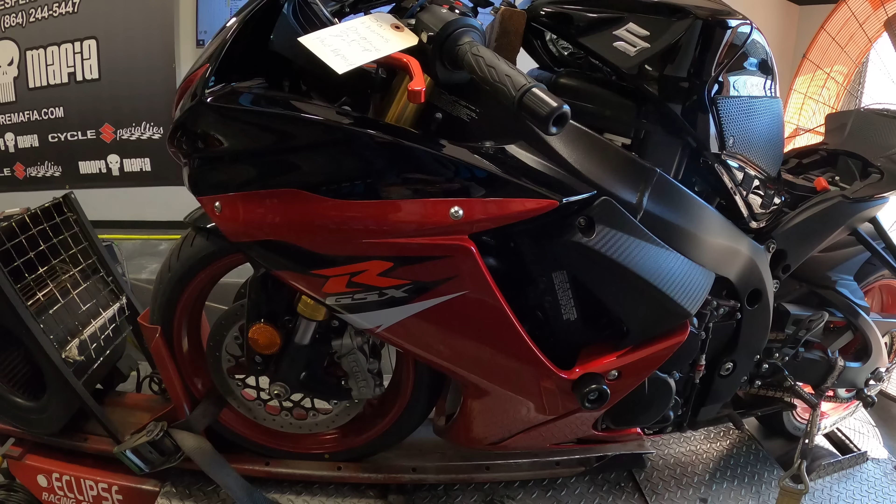Anyways, today we got a 2018 GSXR 750 with a Taylormade exhaust system. Now, I know we have dynoed a bunch of GSXR 750s on the channel in the past, but this is one that we haven't had a chance to show this exhaust system. Everybody likes to see what the different exhaust sounds like. Everybody likes to see what the different exhaust puts out for horsepower.

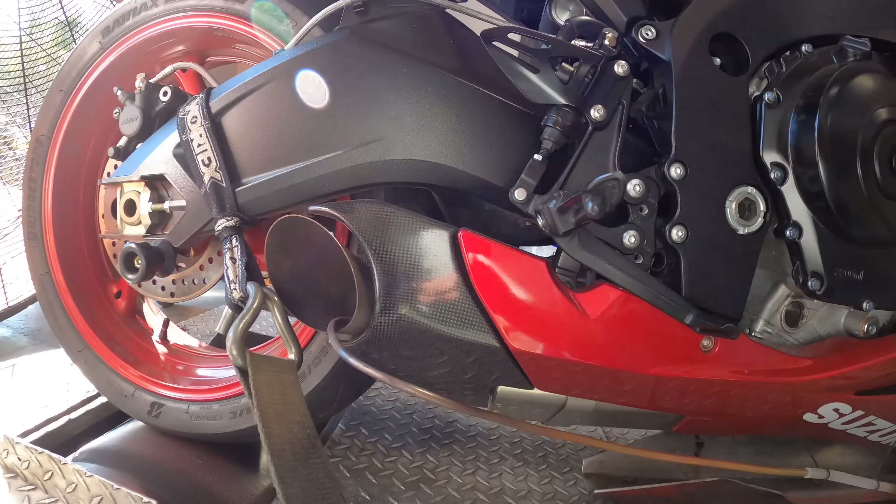If you're shopping for exhaust, maybe this is one you've been looking at. You can go back in, watch the other videos on my channel with GSXR 750s and compare how it sounds with my camera in this room and how the horsepower numbers compare.

So anyways, this thing also had a Power Commander 5 and it had an ignition module, and the customer is using the ignition module for his quick shifter. So we're gonna leave the Power Commander installed, but we zeroed out the fuel map. Now, I'm gonna go ahead and jump in and show you what our baseline pull did, how that thing did as it came in. With the Power Commander, with the downloaded map that the customer had installed, way too rich. Let's get into the details, guys.

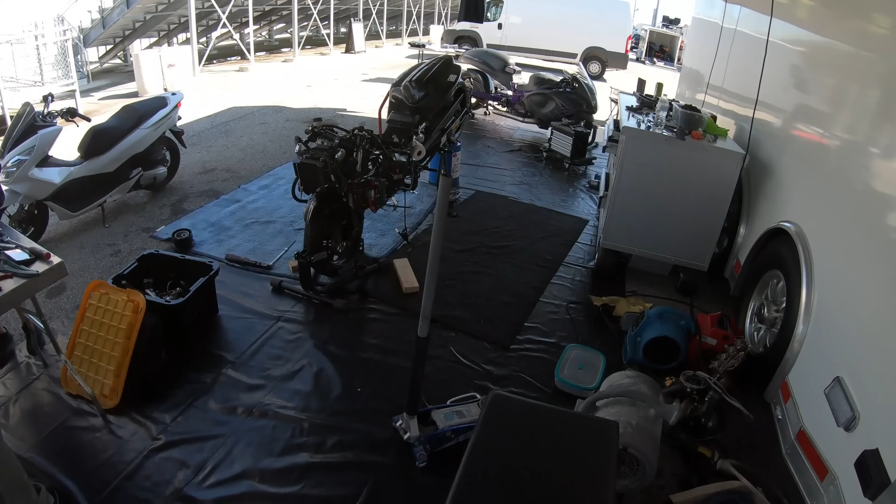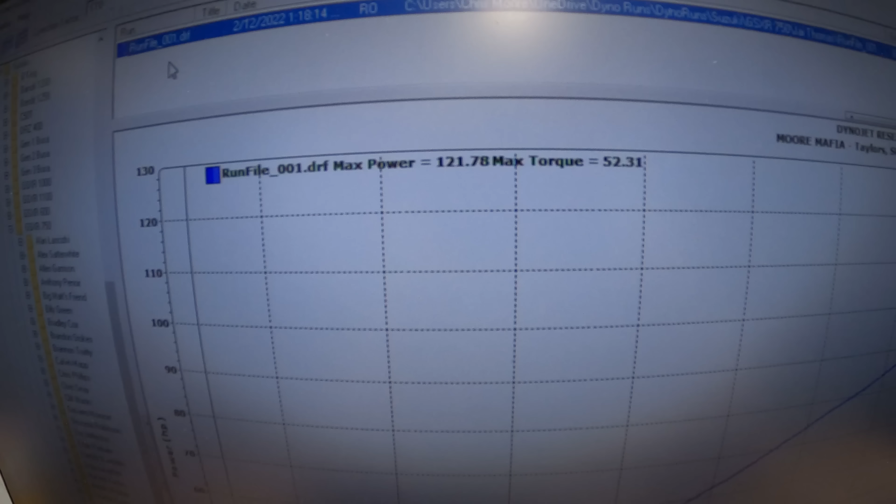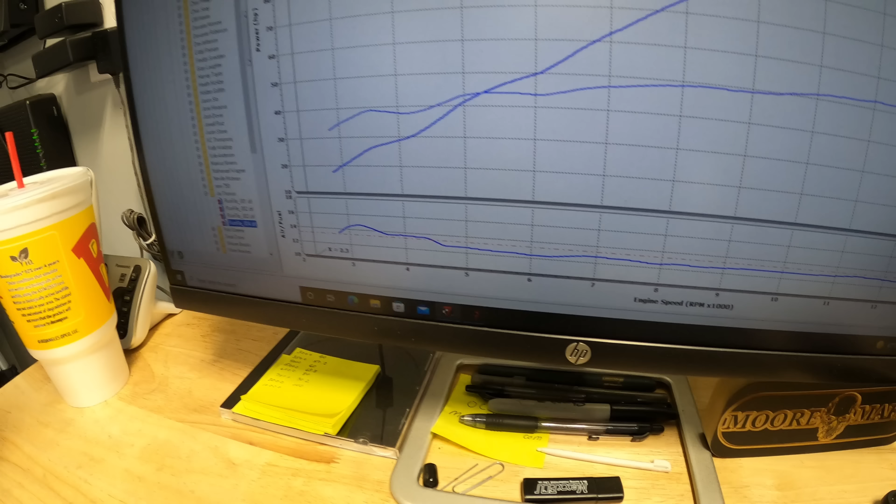Guys, so the baseline pull 121 horsepower and 52 foot-pounds of torque. You can see here how it is not smooth in the top end either. That's because the bike is way too rich, meaning getting too much fuel. Now, that happens a lot with these downloaded maps from Power Commander. They're a generic map and they're going to be built as good as they can be for each bike, but it's not a specific map for that exhaust system a lot of times anyways.

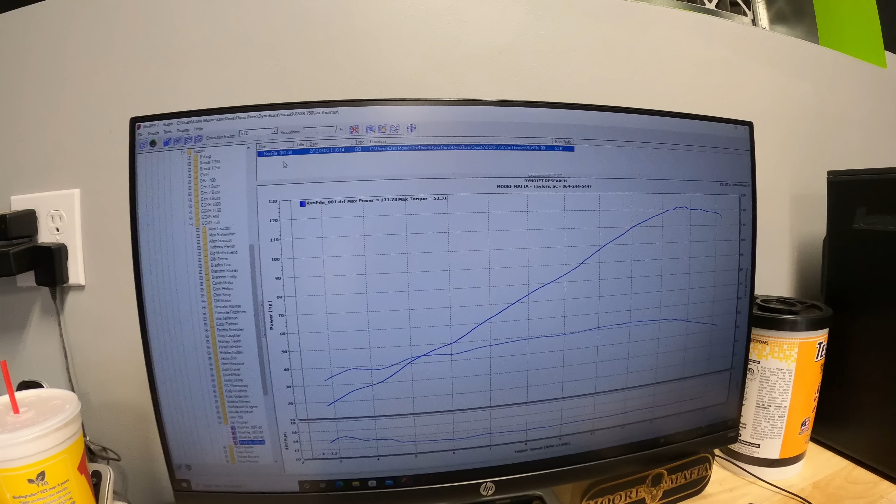So we're gonna dyno tune this thing. We're gonna get some more power out of it, see what we can do. We're gonna remove all the restrictions from the ECU, the top end rev limiter. We're gonna keep the secondary throttle plates open. We're gonna make all that stuff happen, and we're gonna do it right now.

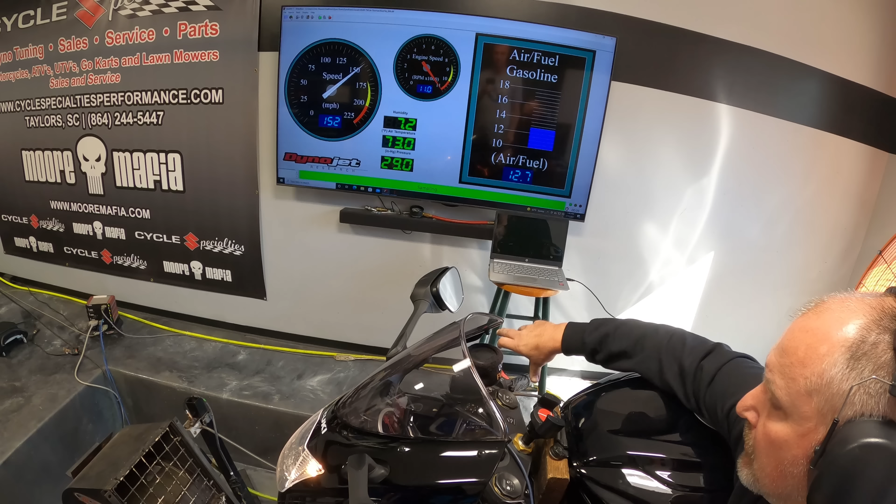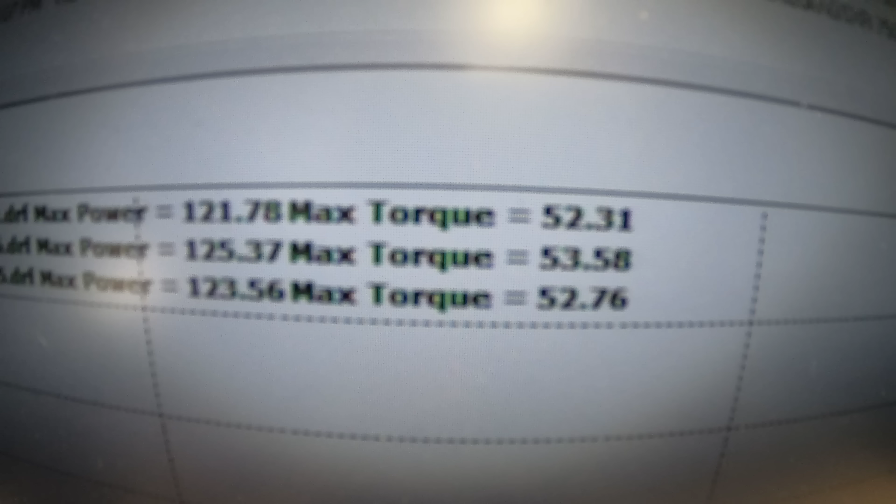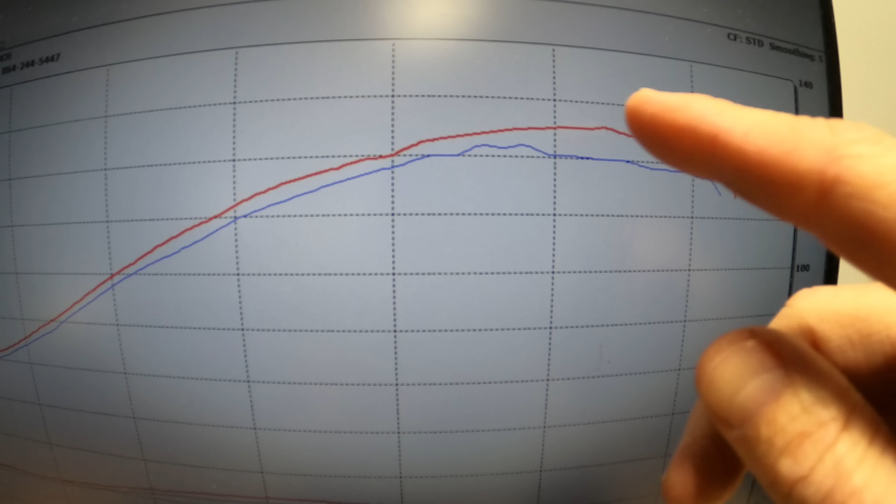All right, guys, so we just did some pulls with our baseline ECU Flash after we cleared out the mapping in the Power Commander, and we ended up with 125 horsepower and 53 foot-pounds of torque. You can see we got gains everywhere. Let's go ahead and clear out the second run. You can see we got nice gains throughout the curve once we flashed the ECU. Smoothed everything out a good bit, but still too rich.

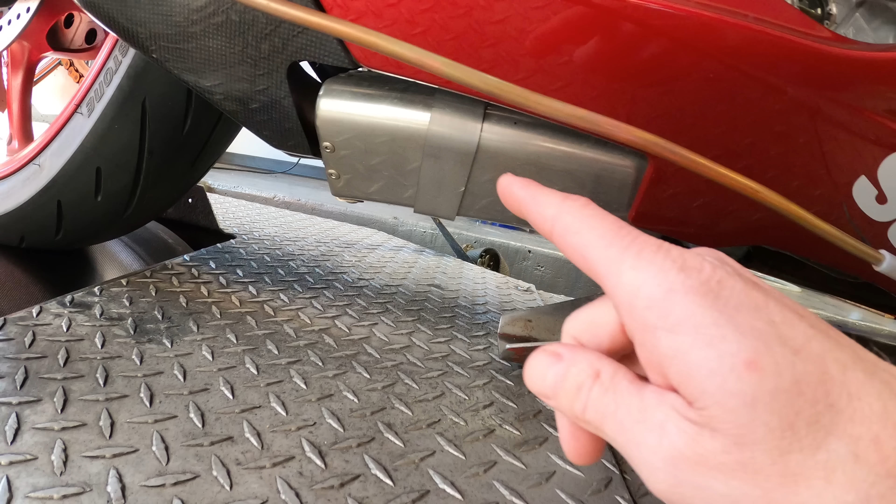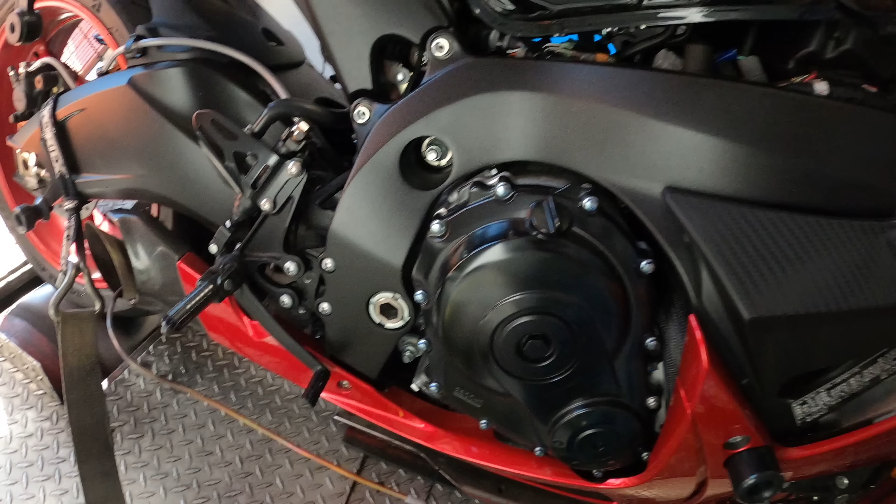So that tells me right there that this Taylormade exhaust is a little more restrictive. We put a baseline fuel map from a Yoshimura exhaust in there to start with, and that still has it too rich. In other words, this bike has a pretty big muffler down here. Now, it's not a catalytic converter, it is a muffler, but that is proven to be more restrictive and not as free-flowing as the Yoshimura exhaust when we do our cat delete pipe, or an M4 exhaust with a cat delete pipe, which requires even more fuel.

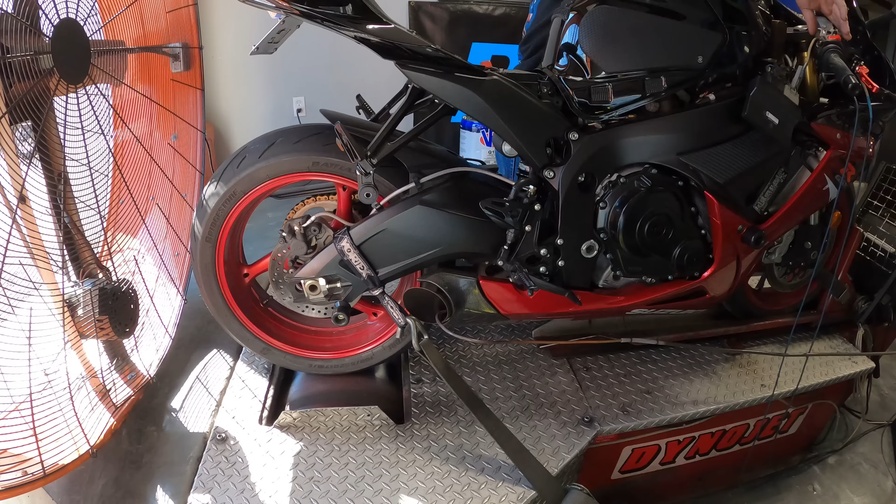So Magic Mike, he's back at the controls today. He's gonna be doing some changing on this fuel mapping, see if we can get this thing dialed in. Watch and see what the gains turn out to be.

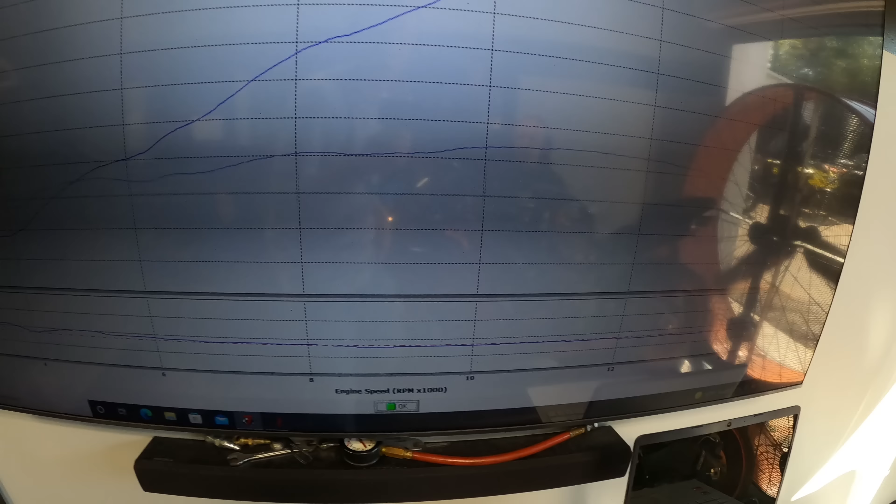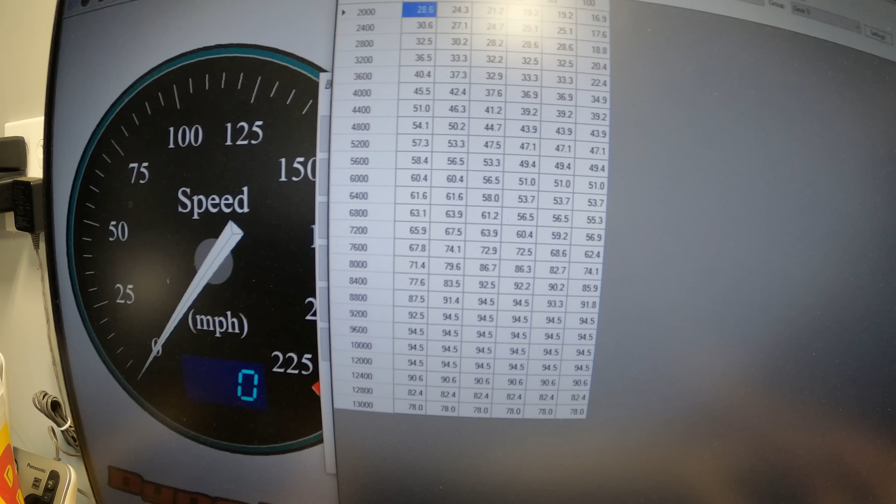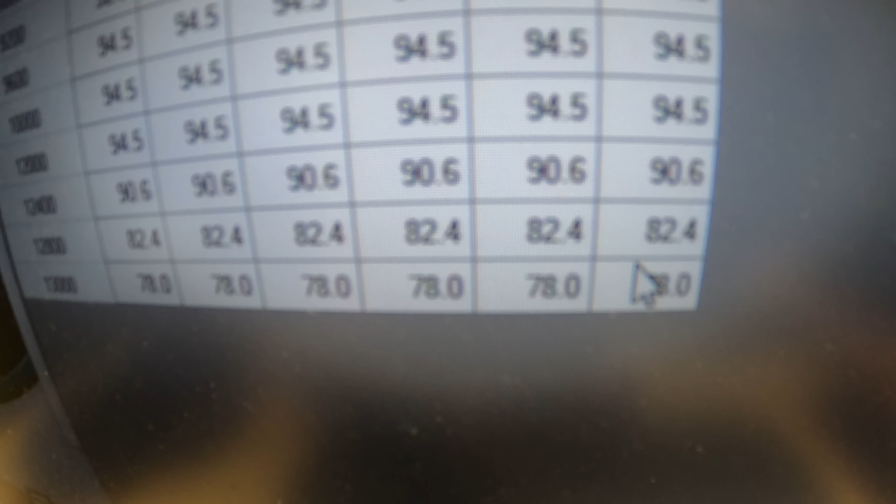Why these GSXR 750s gain so much power with the ECU Flash, even when we're not using the Power Commander. You can see this table here, secondary throttle plate opening. So you can see here when we get to 13,000 RPMs, the bike cuts back to 78% power. So even though you're 100% throttle here, the highest it ever goes is 94.5%, and then it cuts back to 78% at 13,000. These bikes, when we bump the rev limiter up, is 14,800. So that's almost 2,000 RPMs early that the bike is cutting back the horsepower. That's why these things gain so much.

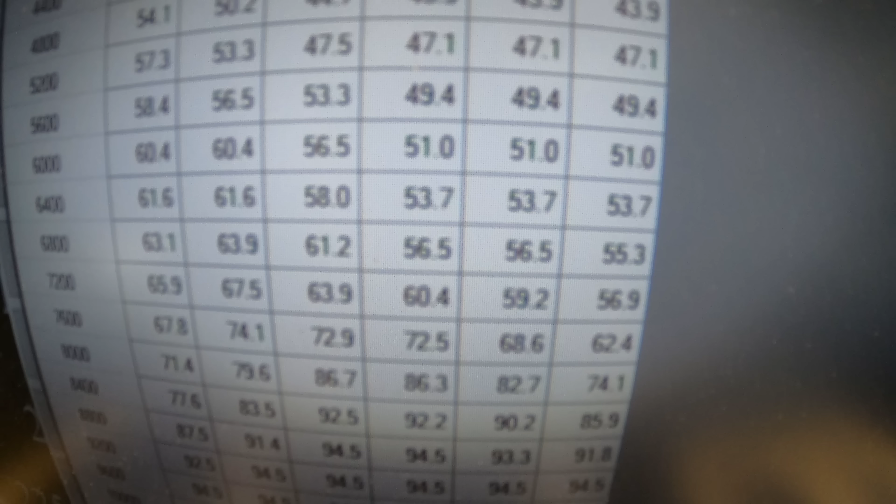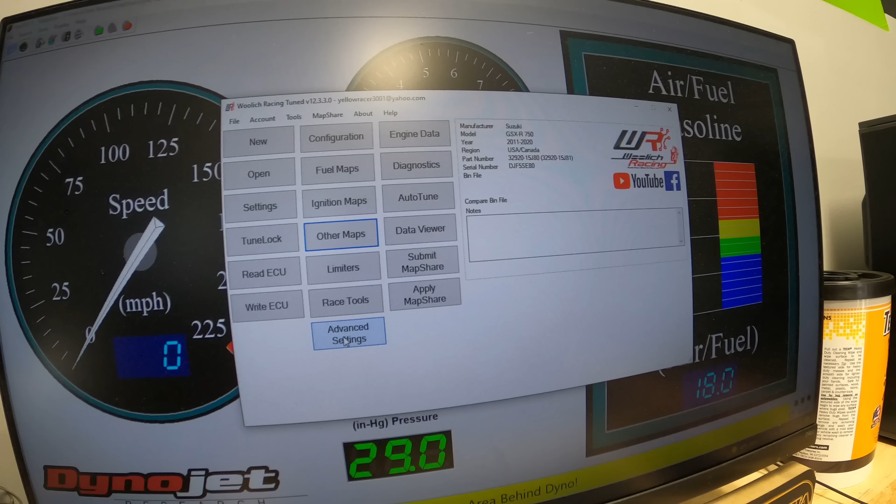You see that's in 5th gear. When we go to 6th gear, pretty much the same thing. When we go to 1st gear, look how long it takes for the throttle plates to go wide open. So even though you're 100% throttle, let's just say it's 6,000 RPMs, the secondary throttle plates are only open 51% of the way in a stock map. So we're able to change that stuff and really make a big difference in the power and the power delivery of this bike. Not only that, we can disable the stock O2 sensor.

We can disable the exhaust valve so there's no need for a servo buddy. We can lower the fan temps here to 105 degrees. And then we also have the option to disable decel fuel cut. That is what causes the popping and gurgling when you slow down on this bike. This customer elected not to go with that option. He said he didn't want the extra noise, to keep his neighbors happy. So we did not select that on his bike.

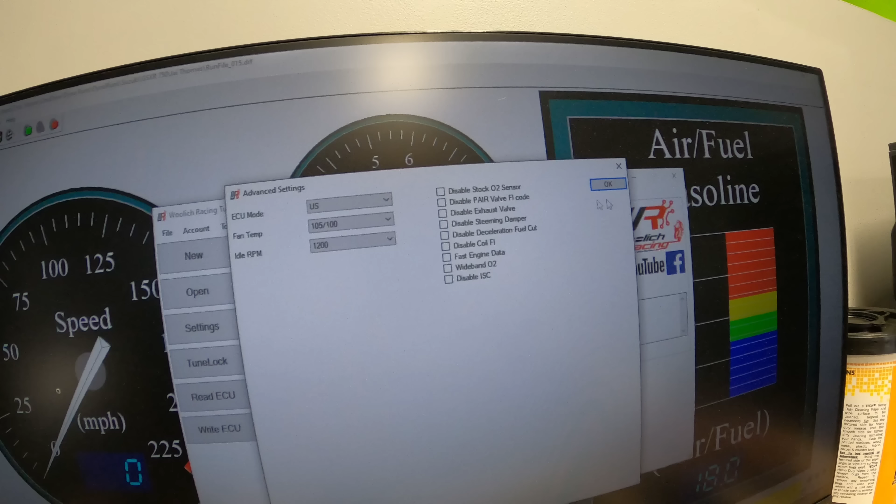This is just a stock map that I opened up here to show you the differences. But man, once you tune these things, there's really a lot of stuff going on that we can disable and get more power out of these bikes. We're almost done tuning this one. We should have the final numbers coming up here in a second.

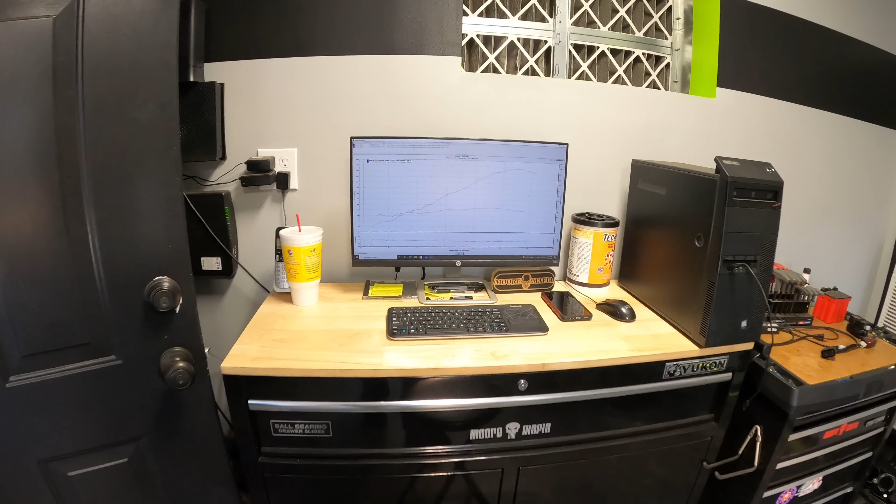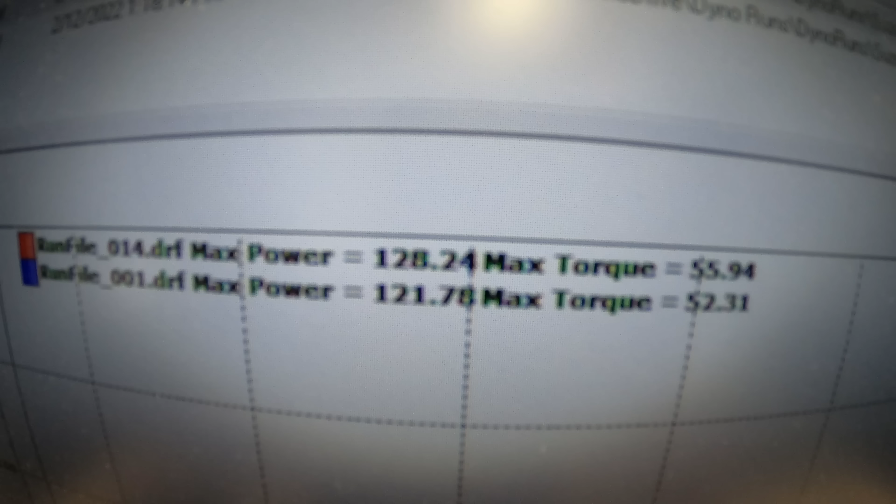Okay, so we just finished up with the tuning. We ended up with 128.24 horsepower. We did get 129 one time you saw on the screen, but that was more of a glitch. This is a perfect pull and it duplicated this run several times. You can see overall huge horsepower gains. 7 and 8 horsepower gains on a 750 is a very noticeable amount.

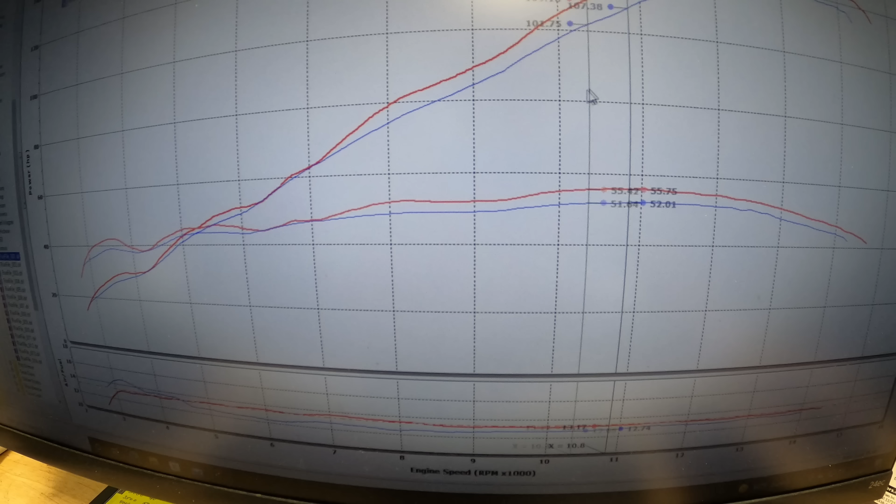You can see even here in our torque section, we gained 3 to 4 foot-pounds of torque throughout the entire curve, which is really solid as well. And we're able to hold the RPMs longer with our extended rev limiter.